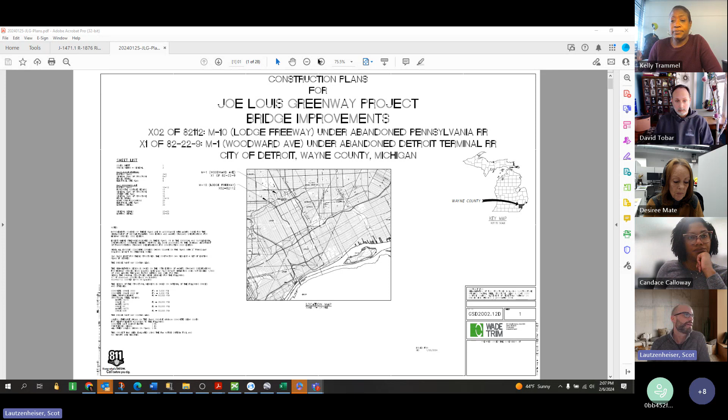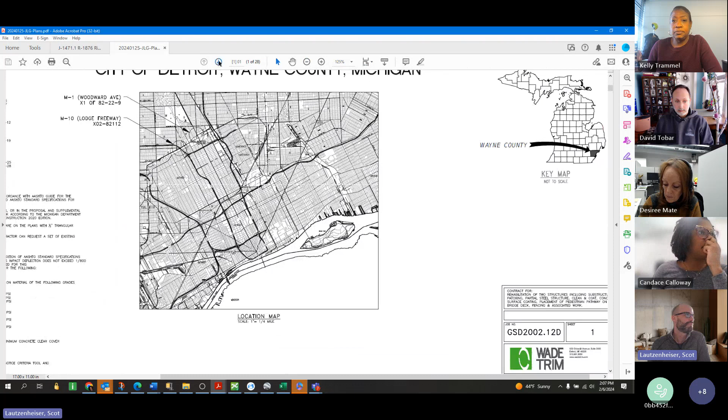All right, so I'll just start and try to keep this kind of brief, just going over the overall improvements, and then Bob will speak to the structural rehab portions of it for each bridge. As David mentioned, we're looking at the two bridges at Lodge and Woodward, so pretty close proximity to each other. I'm going to skip over to the proposed plans for the trail.

So there is a concrete pathway going over top of Lodge once the rehab work is completed. In conjunction with this is railing improvements and lighting improvements. The lighting would be consistent with the rest of the Joe Louis Greenway. And the limits of the site work are really pretty much confined to both edges of the bridge itself. We're actually limiting right at the face of this wall here on the left side, and not doing any work on Rosa Parks. So really just focused on this bridge stretch here, and then just to the east for the Lodge.

And then real quick, Scott, if you go back, I do want to point out immediately east of the bridge, we do own that land, and essentially it's maybe about an acre. So that would be available for your teams to stage and operate within. We also own land on the west side of Rosa Parks, but I imagine it'd be much simpler and a much more controlled position on the east side of the bridge. But I'll leave staging up to you. That's kind of the opportunities for staging for construction.

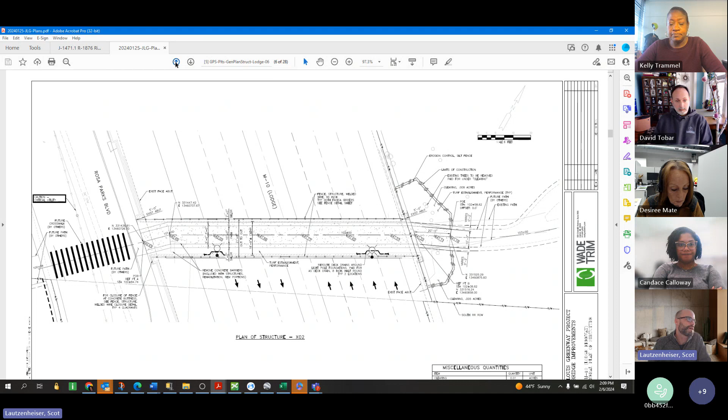Thanks, David. That's a great point. Bob, do you want to speak to the structural repairs for Lodge before we move over to Woodward?

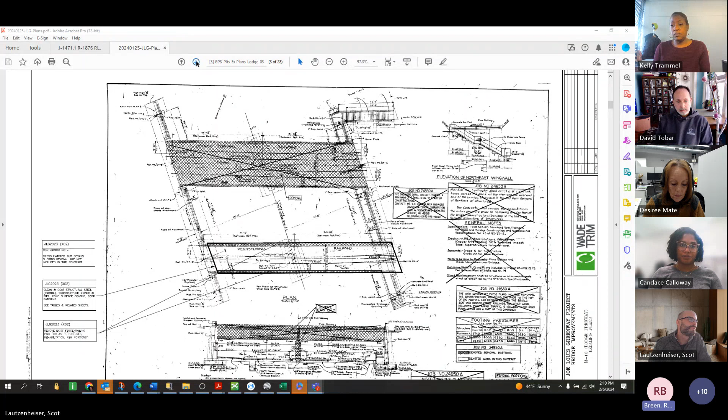Sure. Yeah, it's pretty much basic rehab. There's some concrete patching on the pier substructure. We're not doing anything at either abutment because they're part of the retaining wall system that's through that stretch of the Lodge Freeway. So there is some patching at the pier that will occur, so therefore that freeway MOT will need to be in place for that. Then it's going to get a concrete surface coating according to the plans and the schedule, painting in there.

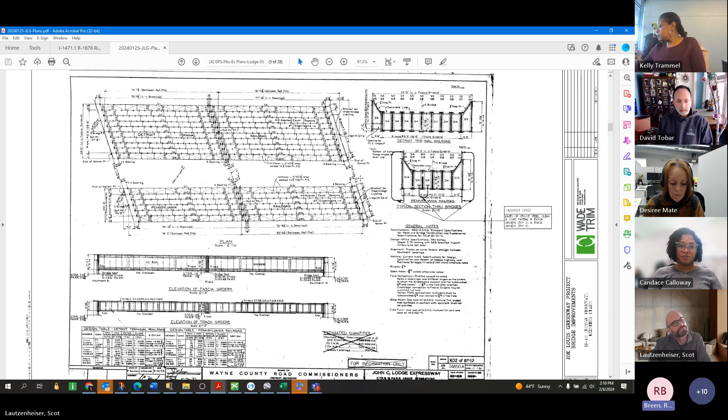And then the steel superstructure, pretty much the same thing. There's no structural steel repairs called for, but we are looking for painting on the outside of the fascia girders and the bottoms and up the flanges for a certain height. It's detailed on the drawings, the extent of the limits of the painting. And there's a schedule of paint colors that we're looking at for the painting on this bridge.

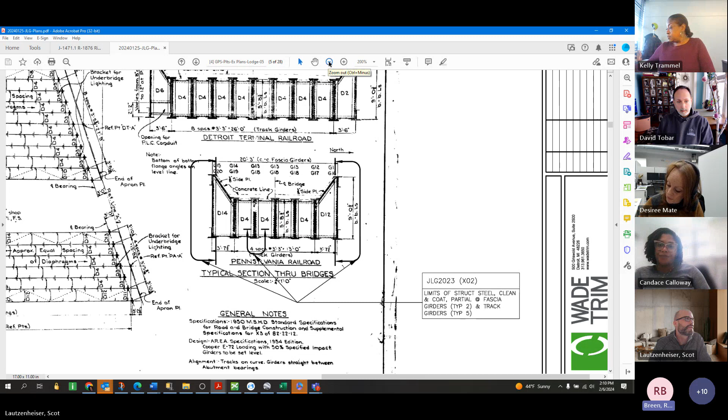And then as far as within the deck for the placement of the concrete surface, there'll be some excavation of the top material. There's a lot of weeds and growth up in there, and I believe there's some concrete blocks sitting in there that'll need to be removed. But the existing ballast will be used. And then, as you can see in the cross section, we've got a geotextile separator, and then some subgrade build up for the concrete sidewalk to sit on.

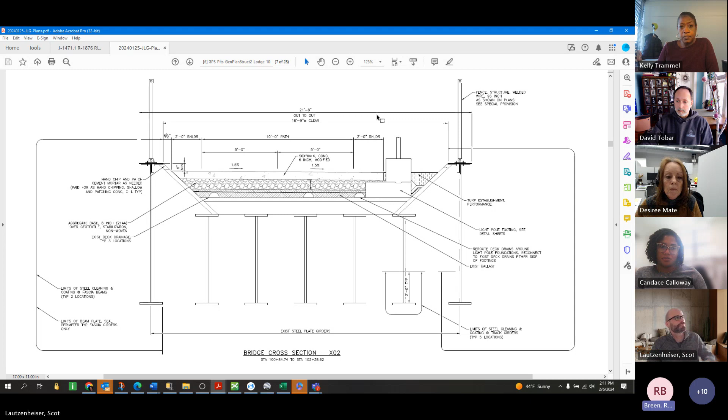And then, as Scott mentioned, railings will be adapted to fit on the existing tops of the girders on either side. There's existing fencing there now that'll be removed, and a new fence will be put in, but the posts we have detailed to fit on top of the top flange, matching the layout of the existing fencing that's there. Great, thanks, Bob.

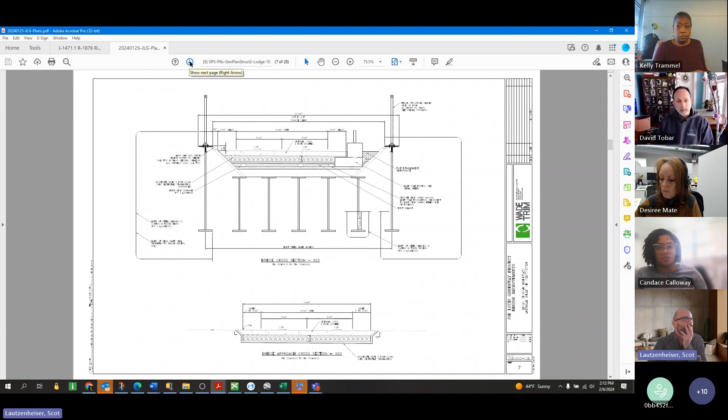So we can move over to Woodward Bridge. This one is a bit more complicated and complex. The intent here is that it's not just a space to travel through. There's some gathering and seating space for folks if they want to take a brief respite on the trail. This structure is also a lot more ornate, with more architectural elements and more detail, and the lighting and electrical components are much more detailed for this bridge. Bob, do you want to touch on the rehab here before we keep going?

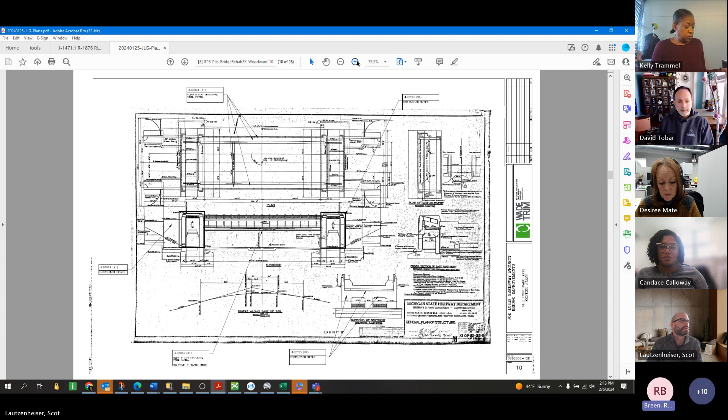Yeah, the rehab here is going to be more extensive. The steel superstructure is mostly in fair to good shape, and we're looking to have it cleaned and coated, similar to what's being called for on the Lodge Bridge, as far as the fascia girders and the bottom flanges of the interior girders or floor beams here. The big item, if anything, is the concrete repairs at the abutments. You'll see it's kind of a pass-through type abutment.

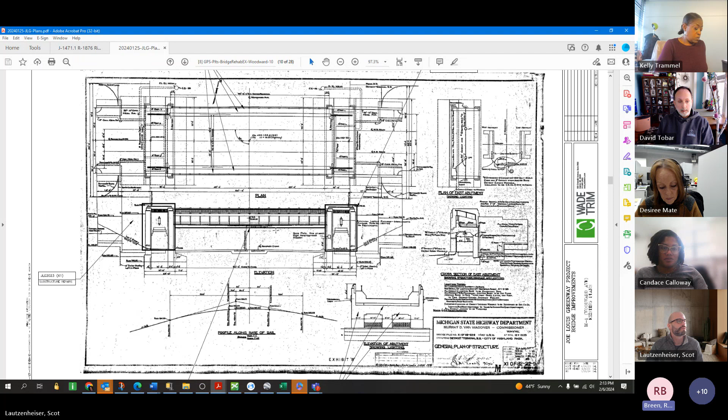You've got a sidewalk that actually travels under a portion of the abutment, comprised of the back wall to one side of the sidewalk, and then a multi-column pier of sorts on the roadside, and both, the piers probably more so, need fairly extensive rehabilitation as far as removal of concrete and patching of the concrete surfaces.

It's a typical MDOT type of concrete rehab where we've identified the area. We've got some identified quantities on the plans in the quantity box, but it's one of those things that as you get into it, there could be a little more concrete removal needed to get to the sound concrete criteria. But it'll be the same way at both abutments. And once they're finished with all the patching, they both receive concrete surface coating as well.

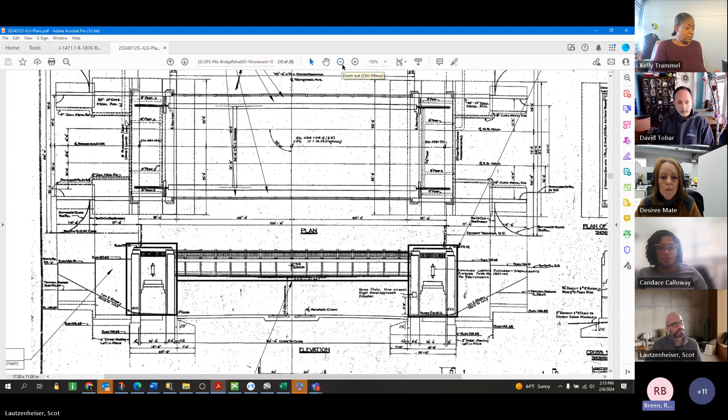The existing top railing is going to be rehabilitated, and that shows up. We provided as many of the existing plans as possible, and we have the typical details for patching.

See there. Oh wait, I'm sorry. Okay, there's two elements of railing. If you look at this cross section, this bridge has maintenance walkways from when it was used as a railroad bridge. So you have this somewhat cantilevered walkway on either side, maintenance walkway.

We're not allowing necessarily to have pedestrians using these walkways as part of the pathway system. So they are closed at either end, but to retain kind of the historical look of the bridge, there are repairs to that outside rail that's noted, remove and replace butt rails there. So there's work at that railing, and then on top of the top flange, we're adding a new smaller rail on top just to gain proper heights for safety reasons.

So you have both the inside rail and the outside rail to contend with. The outside rail is existing, that's to be kind of rehabilitated. And then all of that will get painted along with the structural steel girders.

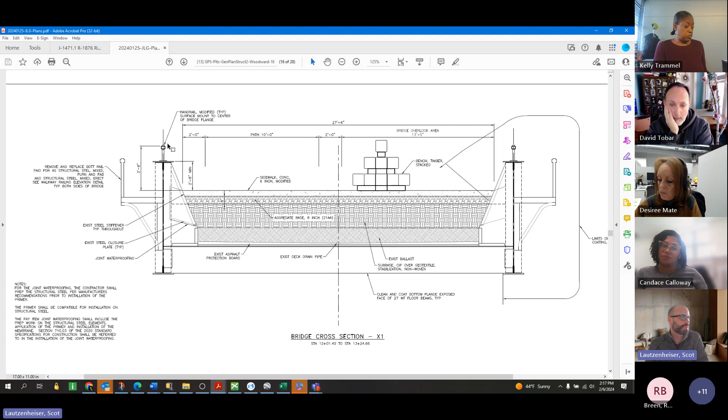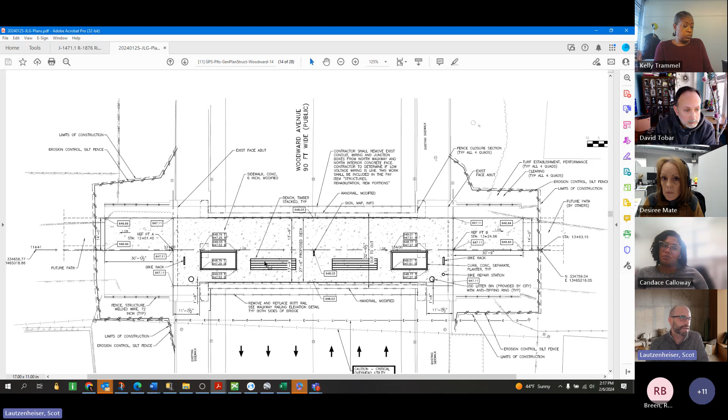I am going to bounce back to the site layout plan. I think it's the best overview of the limits, essentially extending roughly 30 feet on both sides of the bridge itself with that new concrete pathway. Within this layout, there's seating areas, this timber stacked bench, Joe Louis Greenway signage, and then planters as well.

And then in conjunction with this is a pretty extensive lighting components, including the Greenway path lighting, and then some other elements that I'll show on an upcoming plan sheet. I do want to note that this concrete space does have a very specific JLG concrete sandblast pattern that'll be implemented as part of this to be consistent with the rest of the Greenway.

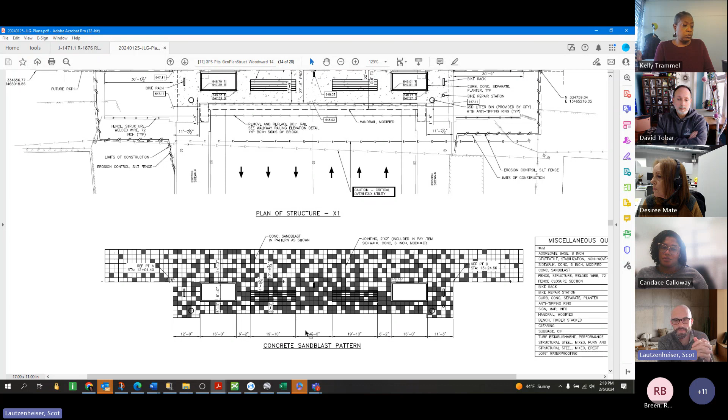And there are improvements at the actual Woodward Avenue level as well. They include removal and replacement of concrete sidewalk, and then the addition of impact attenuators on the northbound and southbound lanes. So you can see those here.

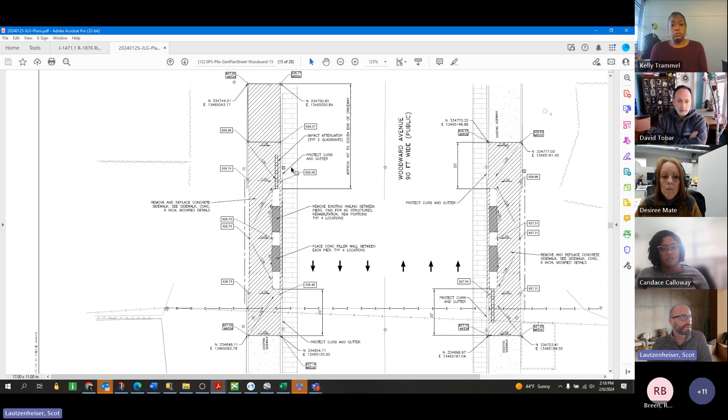Railing is consistent with work beyond the two railings that are on the bridge itself. We get back to this welded wire fence rail to really protect users on those concrete wing walls that extend beyond the bridge.

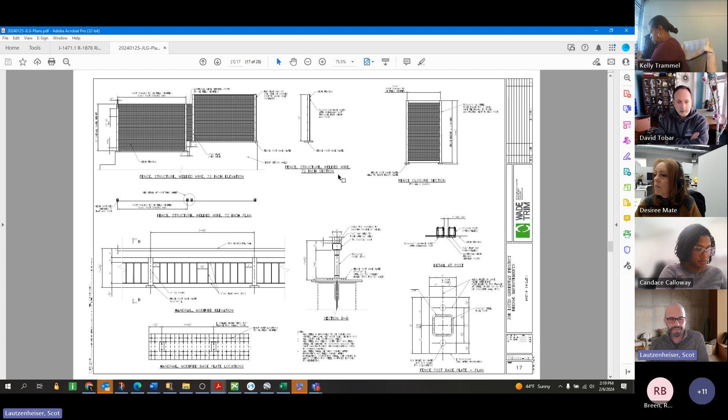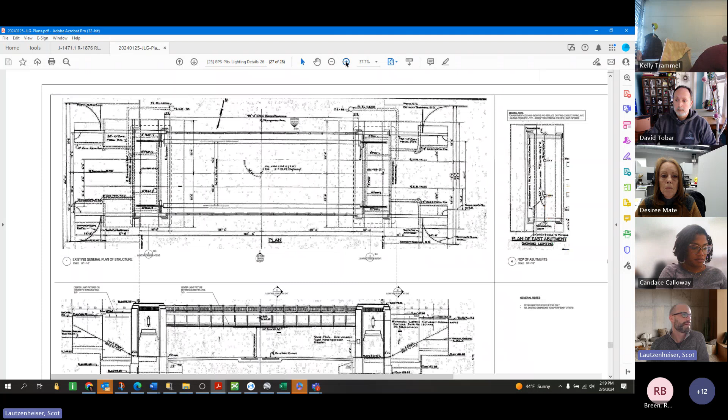And then to the lighting improvements. I think this sheet probably shows it best. So there's a number of different lighting elements that are being integrated. There's these historic facade lights, there's 4 of them that will be replaced. There is an uplight that runs at the base of the steel girder here to really highlight the bridge. And then there's downlights on the wing walls at the 4 corners.

In addition to that, there's the standard ped poles, which are on top of the bridge. And then through each of the pedestrian underpasses on each side, there's a couple of ceiling lights that are integrated as well.

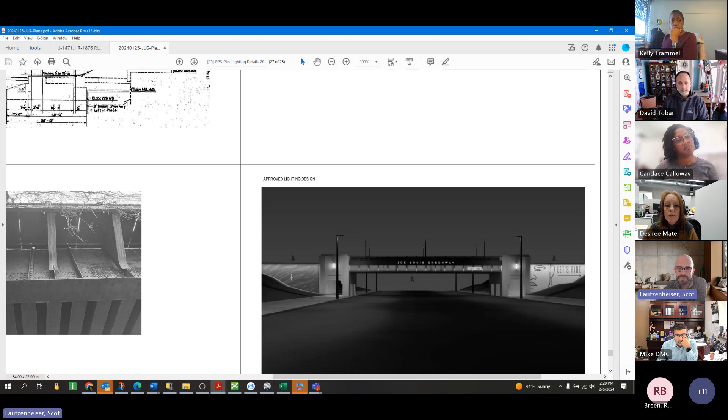David, I do want to just confirm one thing for everyone. I know we show some of the murals. Did you end up including those in this package, or is that going to be separate? It's separate. Okay, thanks for confirming. Just so everyone's aware, we do have the base paint color that is intended to be part of the long-term mural plan.

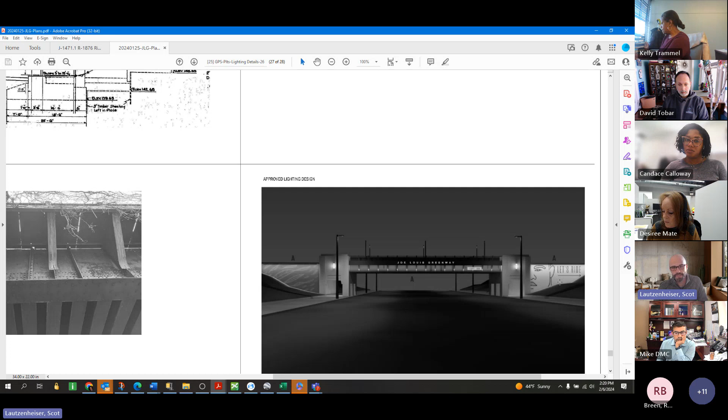So essentially, for instance, this right side that says "Let's Ride," our plan includes painting it that off-white color, but the mural would be done at a later date, separate contract. And then the same for the lodge. There is some lighting here highlighting this mural that'll be done at a later date, but included in the contract would be the base paint color for this section as well as the rest of the sections of this bridge.

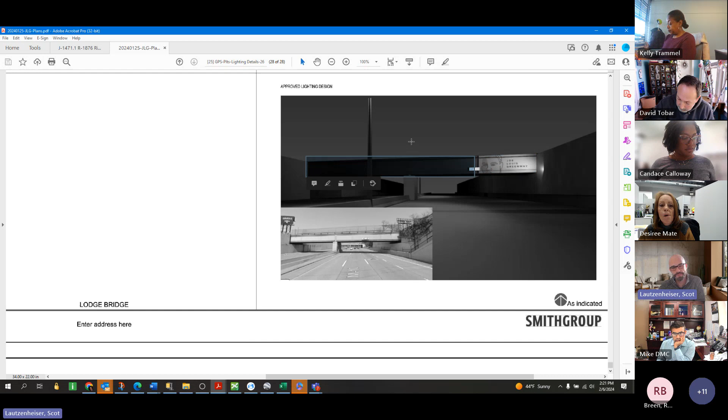All right, I think that about covers it. So I'll turn it back over to you, Kelly. Okay, thank you very much. So at this time, I'd like to open the floor for any questions. You're more than welcome to either put it in the chat, raise your hand, or you can unmute yourself and just shout it out.

This is Andy O'Connor with CA Hull. I see you have two separate Excel bid forms, one for each structure. For the price component, will they be scored together? Or is there a chance you would only have funds to do one but not the other?

So for purposes of the evaluation and pricing, we will score them together. It will be a combined amount. Now, once we decide to move forward with the awardee in the contract, there may be deviations to that, or we may have a contract for both, but we may only utilize one portion of it at this time.

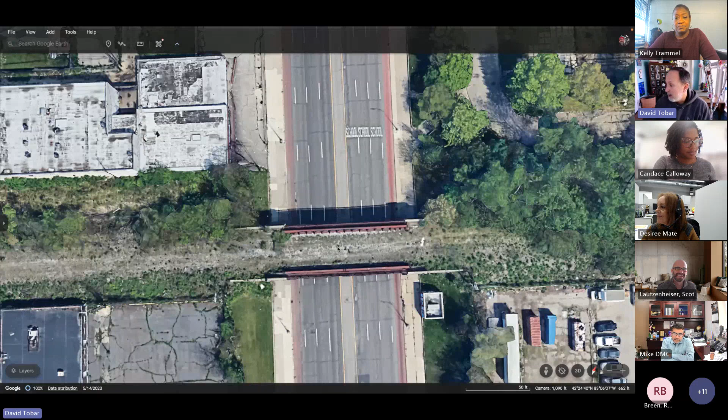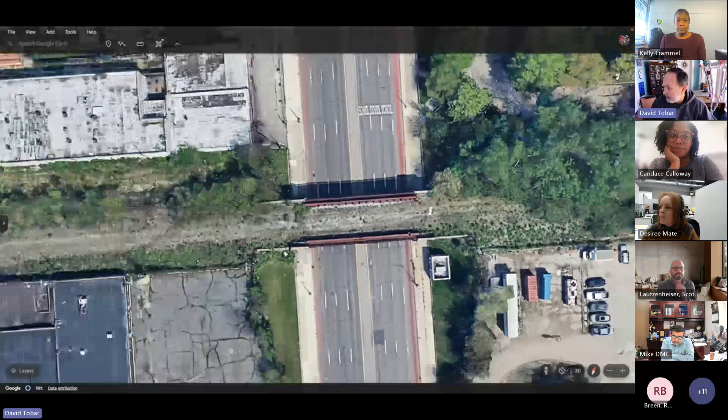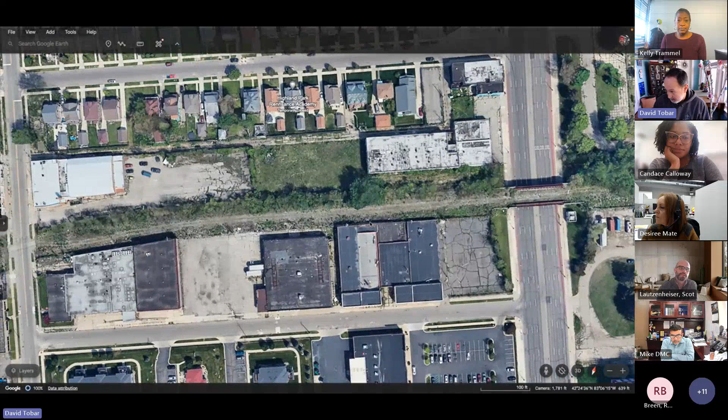I do want to point out, let me share my screen real quick. Okay, so I talked about the Lodge and the staging. This is the Woodward. And timing wise, again, there is opportunity on both sides of the bridge to get up at grade, sorry, let me pan out a little bit, from the east and from the west, but it is a much longer approach. So from the west, you're coming from Second, and Oakland is probably closer, maybe 3/4 of a mile to the east. So a little bit more challenging.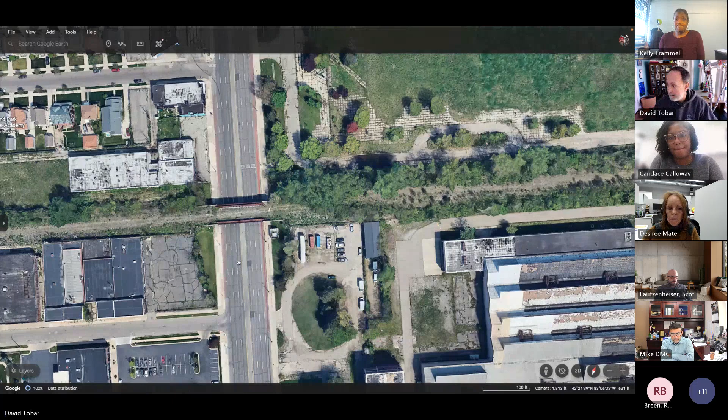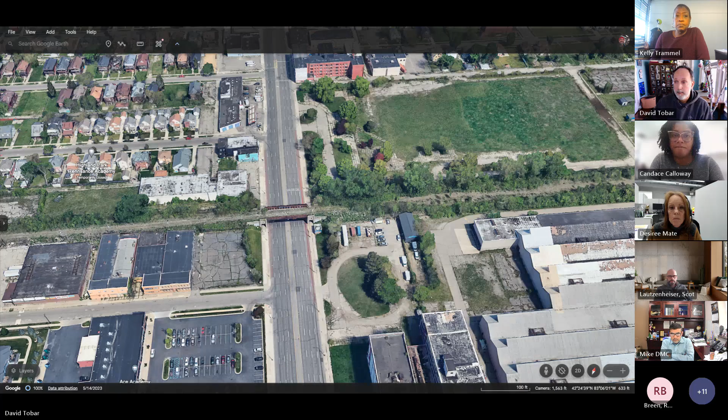Okay. Again, this is in Highland Park, and the Lodge is in the City of Detroit, but both are within the MDOT right of way. So we are in process of securing those MDOT permits, and we'll work with you to procure those permits once they're ready. Do we have any other questions? Go ahead. I'm sorry, Andy.

Oh, I'm sorry. Yeah, so regarding the MDOT maintenance of traffic requirements, do they list those in this proposal, or are they still reviewing them? And ultimately the biggest thing is on the Lodge Freeway, when can we pull single or double lane closures? Similar on Woodward. Yep. Yeah, we have some clarification into them right now on that specifically, and we're hoping to have feedback from them within the next week, and we'd be able to issue an addendum right after the due date for questions to clarify that. Yeah, so our first pass is in the drawings you have, but they do have comments as of last week, and we're updating that. So expect some updates to that. Sounds good. Thank you.

Okay. Any additional questions? Okay, again, I just want to reiterate that you must be registered as a vendor with the city of Detroit. I have Cedric McCree and Tracy Thompson's name and contact information in the chat that will be able to assist you. This bid does close on February the 27th at 3 p.m. Eastern Standard Time. Our question due date is February 12th at 3 p.m. Eastern Standard Time. All questions that were answered today are nonbinding. If you're looking for a binding response, please upload your questions through the Oracle Supplier Portal, and then we will get you those responses back in a formal addendum.